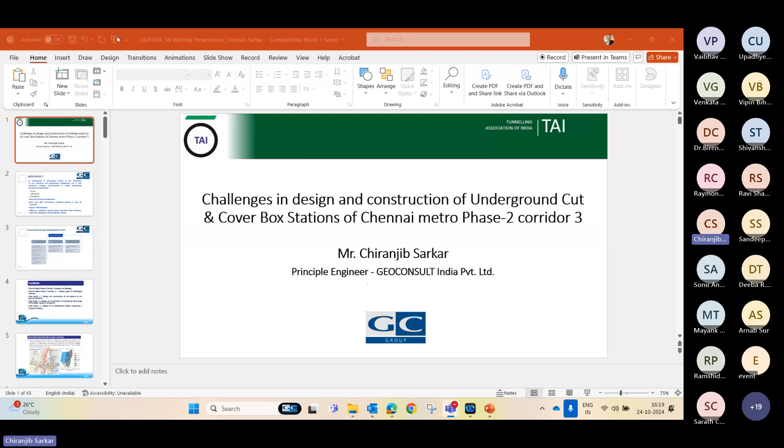Good afternoon, everybody. Today I'm going to share my experience in the design of tunnel and underground structures for metro projects. So the topic of my presentation today is challenges in the design and construction of underground cut and cover box stations of Chennai Metro Phase 2 Corridor 3.

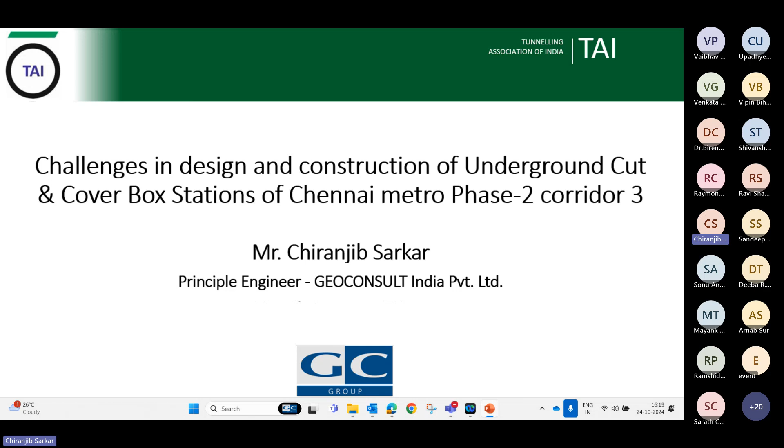About myself, I'm Chiranjib Sarkar, Principal Engineer of GeoConsult India Private Limited, also a governing council member of TAI. GeoConsult is an engineering consultancy group of various disciplines like civil, structural, geotechnical engineering, soil and rock mechanics, geology, environmental and mining engineering, and electrical engineering. We have offices in Argentina, Austria, Brazil, Colombia, Chile, Germany, India, Peru, Singapore, Slovak Republic, and Turkey. These are the presences of GeoConsult in Europe, the Americas, and Asia.

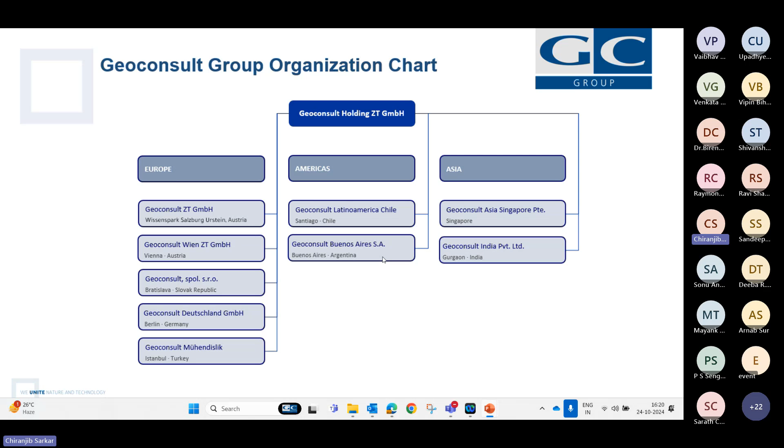Now I'm moving back to my main technical presentation. These are the contents of today's presentation: general overview, location, and geology of Chennai Metro Phase 2 Corridor 3, various types of challenges, and features of Chennai Metro Phase 2 Corridor 3. In today's presentation, I will discuss three major challenges as three case studies.

Case study one, our first case study, is the design and construction of the UG station at mixed ground condition. The second case study is the design and construction of an intersecting interchange station laying at mixed ground. And the third case study is the design of an underground station supporting an entire flyover and ramp.

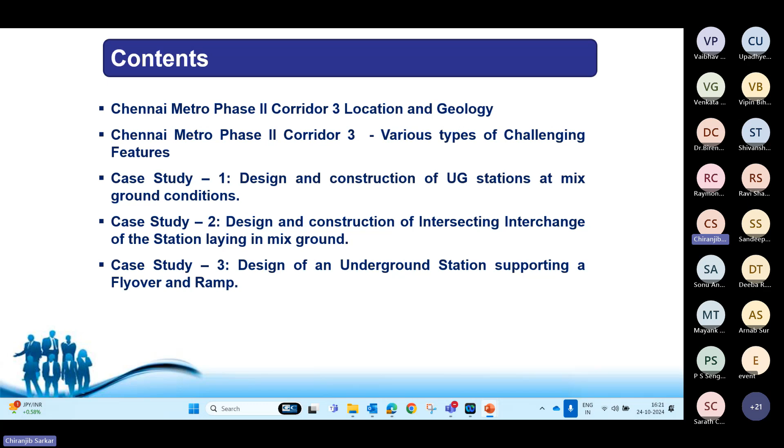The current slide shows Chennai Metro Phase 2 Corridor 3 in purple color line. I think you can see it includes 29 underground stations and 20 kilometers of associated tunnel. The entire Corridor 3 has been subdivided into 5 contract packages: UG1, UG2, UG3, UG4, and UG5.

About the geology of the entire city, it is classified into 3 region-based geology types: sandy area found along the river bank and coastal region, clay area mostly covering the city, and hard rock area found in some central and southern parts of the city.

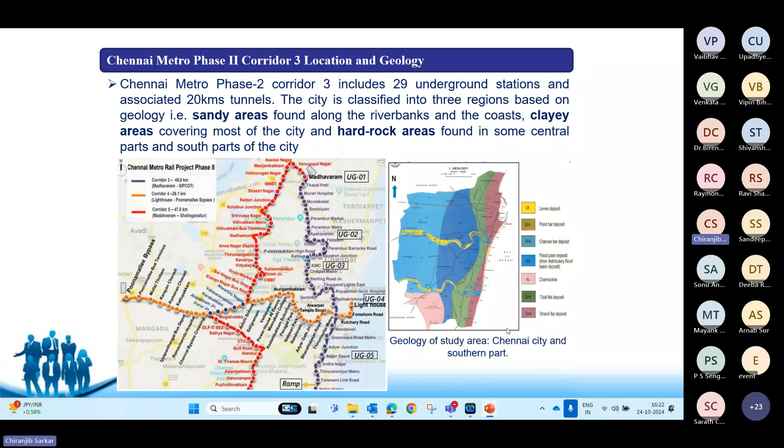Chennai Metro Phase 2 Corridor 3 contains various challenging features like underground station at mixed ground condition, meaning half of the station situated in soil and half in rock. This is called a mixed ground condition. Then there is an intersecting interchange station laying at mixed ground.

It's an interchange between the Corridor 3 and Corridor 4 line. You can see this intersecting interchange is also situated in a mixed ground condition, where half of the station is situated in soil and half is laying in rock.

Then there is a flyover running along the length of the station. You can see the station is supporting the entire flyover and ramp. The fourth feature is the UG station having a crossover and 2 levels of parking. Among these challenging features, today I will discuss the first three as three case studies.

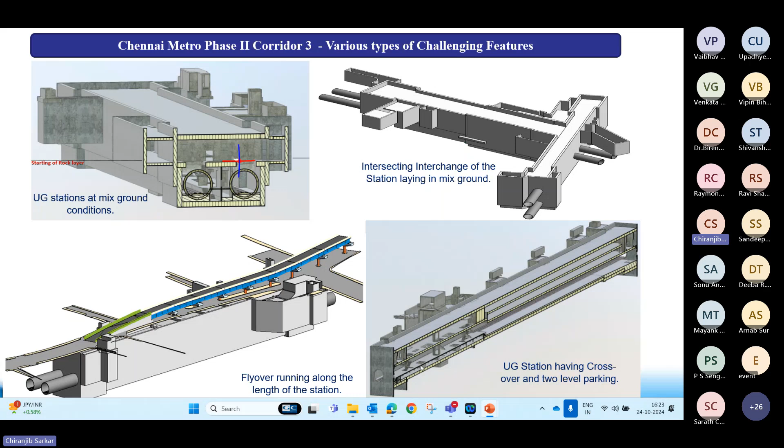Case study 1, case study 2, case study 3. Now I will directly move to case study 1, which is the design and construction of the UG station at mixed ground condition.

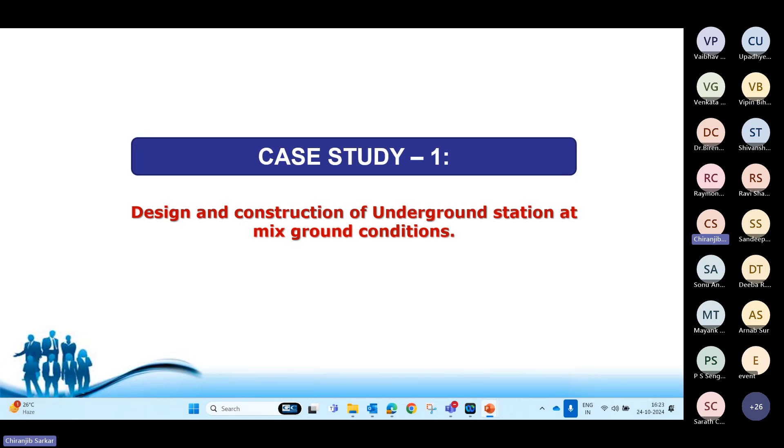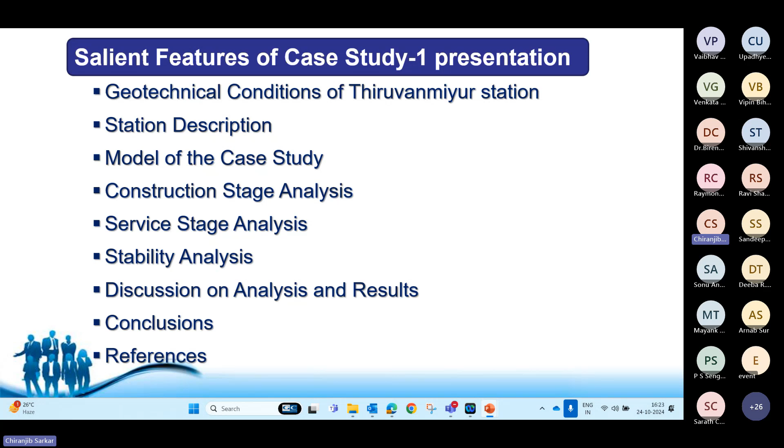These are some major salient features of the case study 1 presentation, the geotechnical condition of the case study, which was chosen for the Thiruvanmiyur metro station. Then the description of the station, the model of the case study, construction stage analysis, service stage analysis, stability analysis, discussion on the analysis and results, conclusion, and a few references.

So the design and construction of the Thiruvanmiyur underground metro station of Chennai Metro Phase 2 Corridor 3 has been chosen here as a project-specific case study. Thiruvanmiyur UG station belongs to contract package UG5.

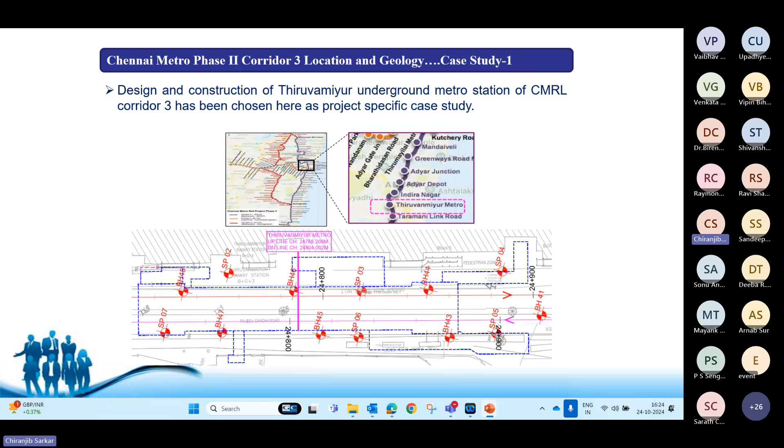The current slide shows borehole locations marked into the station layout. Based on borehole location, a geotechnical long profile has been further plotted, and you can see the station box has been superimposed into the geotechnical long profile.

Now you can see from the rock line diagram that half of the station is situated in soil and half is situated in rock. This is the tunnel profile. This is the station box, the long section of the station.

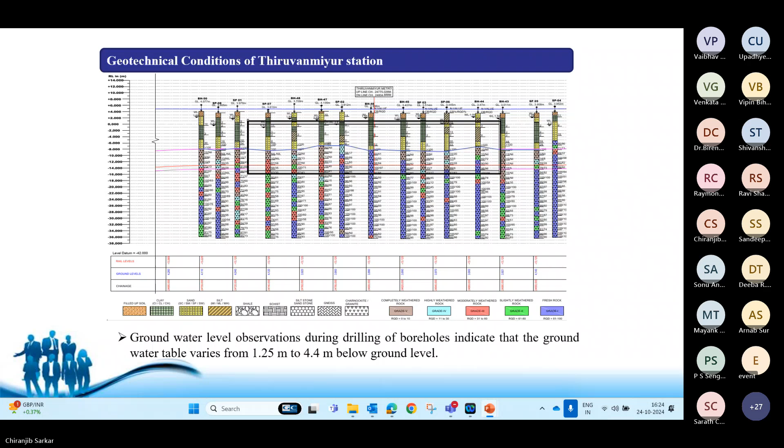Length of the station is 152 meters, height is 16.5 meters, width of the station varies from 20.35 meters at the middle to 24.05 meters at the end, that is at the shaft location.

As I already told in the previous slide, half of the station is situated in soil and half is situated in rock. Due to difficulty in digging in hard strata, as well as the self-standing nature of the rock, the wall proposed here is to be terminated above the base level.

You can see that the wall is terminated above the base level with the help of the shear pin, called toe pin. During the excavation stage, toe pin has been provided to give adequate stability to that diaphragm wall. After excavation and casting of the base slab, a 1.2 meter thick stitch wall has been provided as a connection between the diaphragm wall and the base slab.

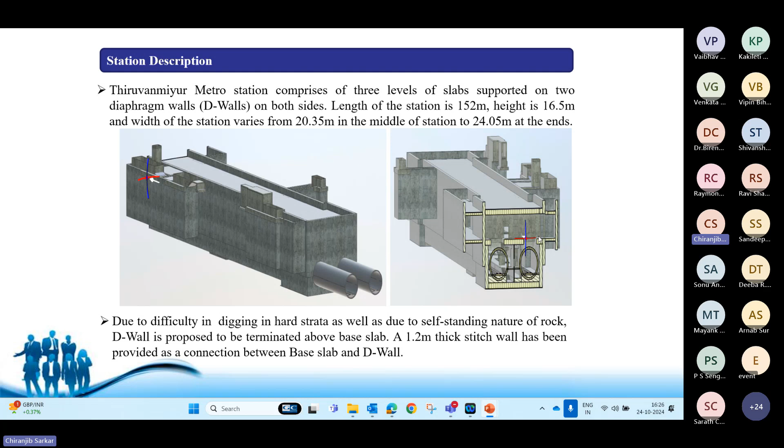This connection will provide the rigid box behavior of the structure. So, due to varying rock layers along the station alignment, three cases have been adopted as part of the model of this project-specific case study.

Toe pin is required for case 2A and 2B. The first one is case 1, that is the diaphragm wall terminating at least 3 meters below the base slab. This is the conventional normal metro station, having a diaphragm wall with embedment length beyond the base layer. That is called case 1.

We don't know the actual starting level of the rock, so three probable cases may arise. There is case 1, then case 2 if rock is encountered above the base level, which is further subdivided into two parts: case 2A, where the rock layer is more than 3 meters below the concourse slab.

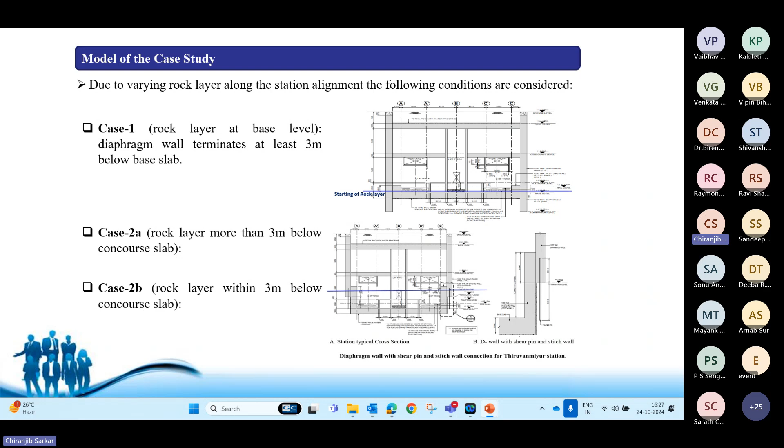And if the rock is within 3 meters below the concourse slab, that is called case 2B. So shear pin is required for both case 2A and 2B.

This is a zoomed-in view of this section, the detailed one. You can see this is the starting level of the rock layer, for example. Due to presence of the hard rock layer, trenching got stuck and the project suffered badly. At that time, toe pin, that is shear pin, was provided below the diaphragm wall to give adequate embedment to the diaphragm wall.

So steel structural members were used as an innovative economical solution, with some utilization of structural steel members in the design of the underground structure.

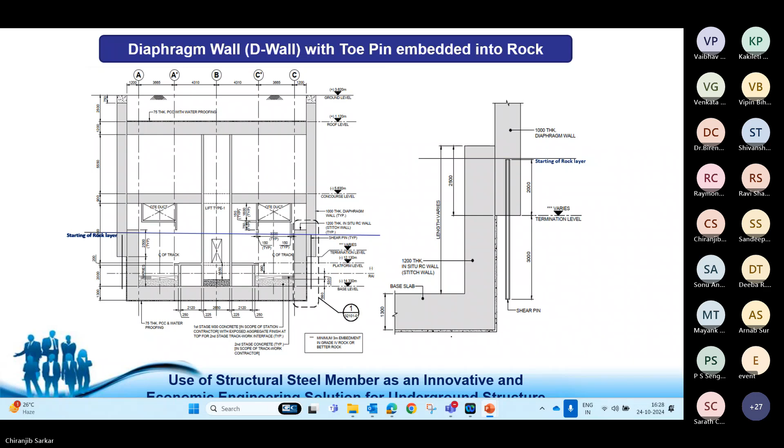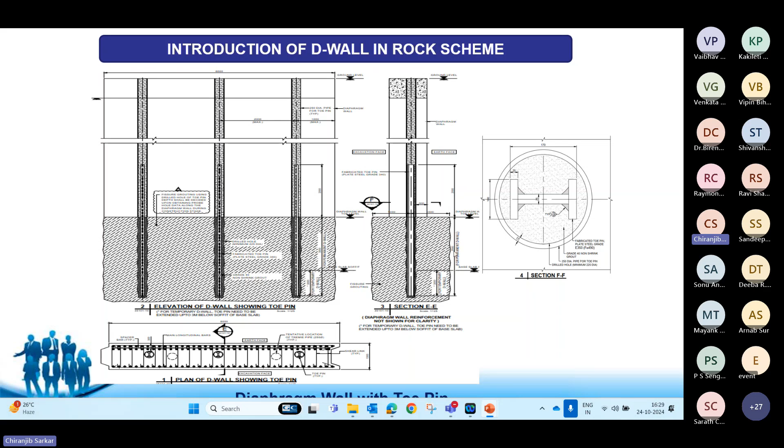The structural steel member is inserted into the diaphragm wall through a 250 mm diameter pipe, and it is embedded into the rock layer through a drill hole. The gap between the tube and the member is filled with grade 40 non-shrink grout material. Further, fissure grout is also provided for the rock for excellent bonding.

Now I will move directly to the advantages of this D-wall with the toe-pin system. First, there is no requirement of separate time and activity for a temporary earth retaining structure arrangement, as the top-down construction sequence with the diaphragm wall has been chosen here. Second, no requirement of separate traffic decking, since with top-down construction it can be easily managed.

After casting of the roof slab, traffic can be diverted above the roof slab. Then there is a reduction in the embedment of the diaphragm wall, as we are not casting the full height of the diaphragm wall. Of course, there is some limitation: it requires more skilled manpower and equipment.

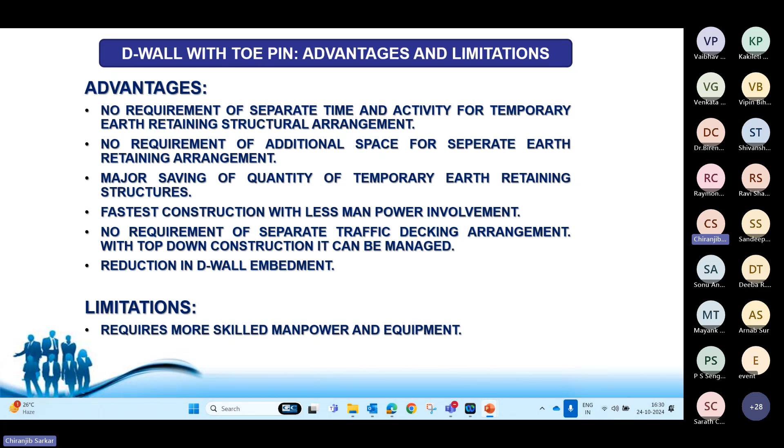As part of the advantages, there is a major quantity saving of the temporary structure. It's a faster construction with less manpower. So these are the advantages. The only limitation is that it requires more skilled manpower and equipment.

As a part of the construction stage analysis, the entire construction stage analysis has been done in the Plaxis software. The toe pin is assigned into the model as a spring stiffness equivalent to the member property.

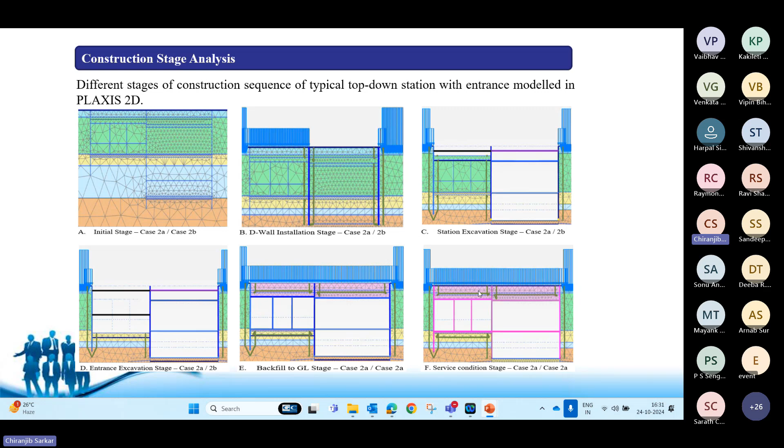You can see this is the initial stage, then the diaphragm installation stage, then the station excavation, then entrance excavation, then the backfilling stage, then the service condition. All these stages have been done for the top-down sequence.

As a part of the service stage analysis, this has been done in the STAAD software for both case 2A to B. Here, the stitch wall has been modeled as an enlarged section, as you can see. The envelope of all cases, case 2A to B normal cases, has been considered during the RC detailed design of the diaphragm wall and the stitch wall.

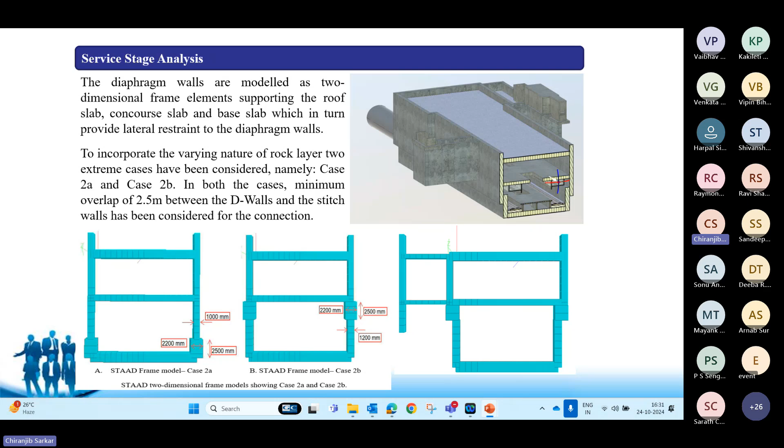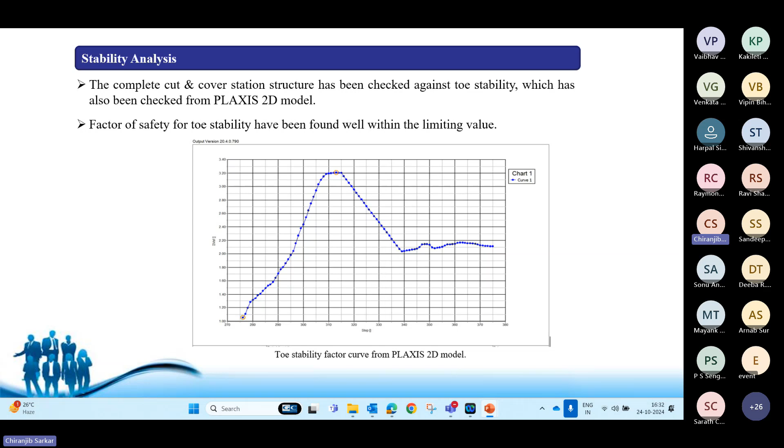As a part of the stability analysis, the entire station box has been checked against toe stability, which is done in the Plaxis 2D software. Factor of safety for the toe stability has been found within a limiting value. Ground stability has also been ensured by checking the ground surface settlement with respect to its limiting value.

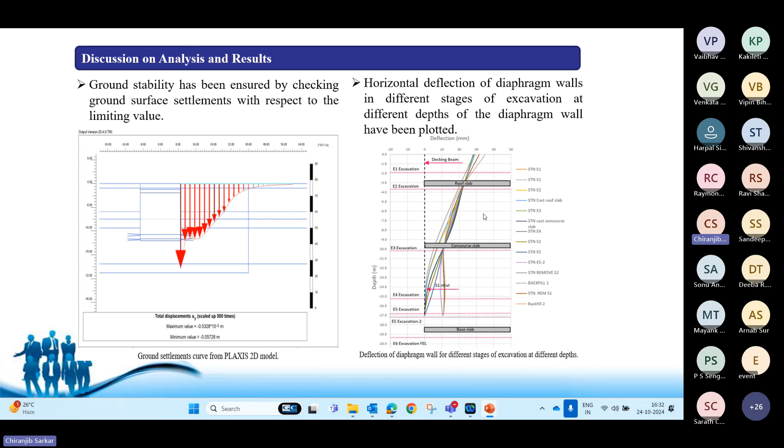We have also checked the horizontal deflection of the diaphragm wall for different stages of excavation, and the horizontal deformation of the diaphragm has also been checked. Now you can see the bending moment and shear force of the diaphragm wall here - these are the bending moment, this is the shear force. Structural RC detailed design has been done based on this envelope diagram.

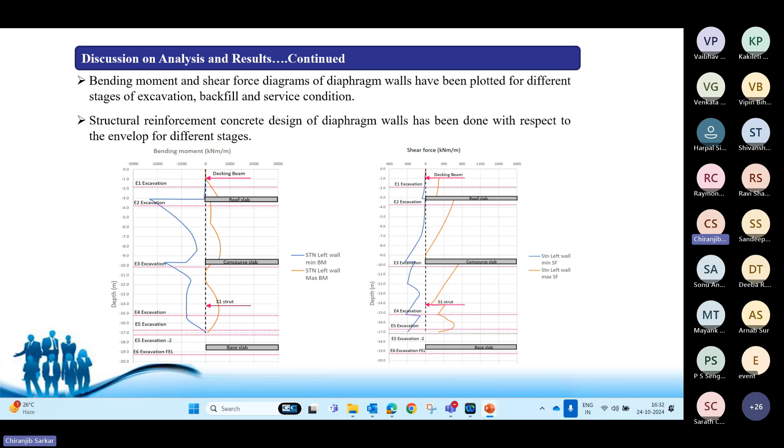Further, structural steel check for the shear pin has been done in line with the criteria of IS 800 2007. Now I will move to the conclusion part for the project specific case study one.

Unconventional and innovative technical solutions may save projects many times from long deadlock conditions. You can see that due to the presence of the hard rock layer, our trenching and digging can get stuck. But as an innovative solution, a shear pin member has been assigned.

So the structural design of the Thiruvanmiyur station, which falls into the mixed ground condition of the Chennai Metro Phase 2, is referred here. Due to difficulty in excavating hard rock strata, an arrangement of a shallow diaphragm wall terminated above base level with a shear pin embedded into the rock strata has been adopted. This arrangement basically reduces the requirement of any kind of temporary earth retaining structure, because here the D wall behaves like the main body of the structure and also a retaining structure.

This arrangement reduces the requirement of any kind of temporary earth retaining structure like soldier piles, secant piles, etc. Therefore, it helps save time, manpower, and material cost of the temporary works and activities for this temporary earth retaining support.

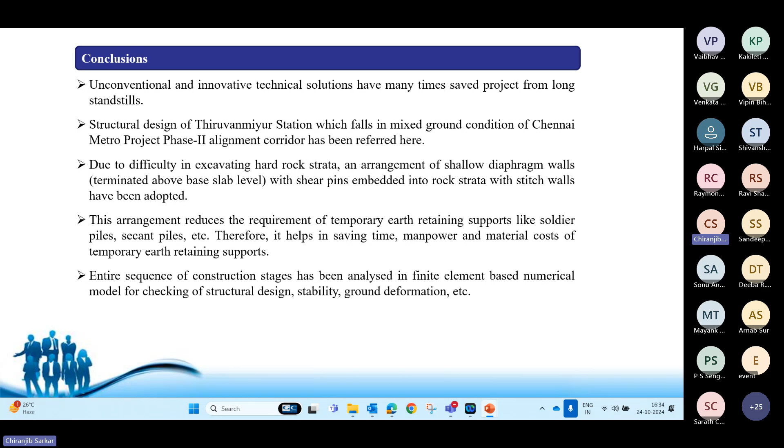These are the few references which have been used during the design of the Thiruvanmiyur station.

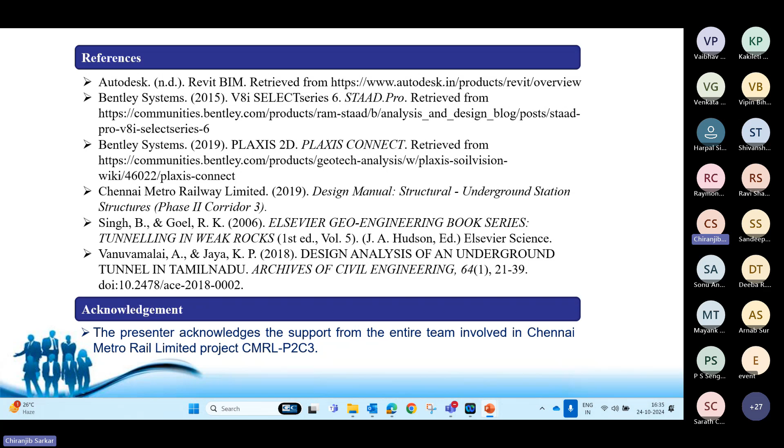I would also acknowledge the support from the entire team involved in the Chennai Metro Rail Limited project - that is the design firm, GC, then the client, and the support from the entire site. Just for information, the present case study has already been published in the Indian Geotechnical Conference IGC 2021.

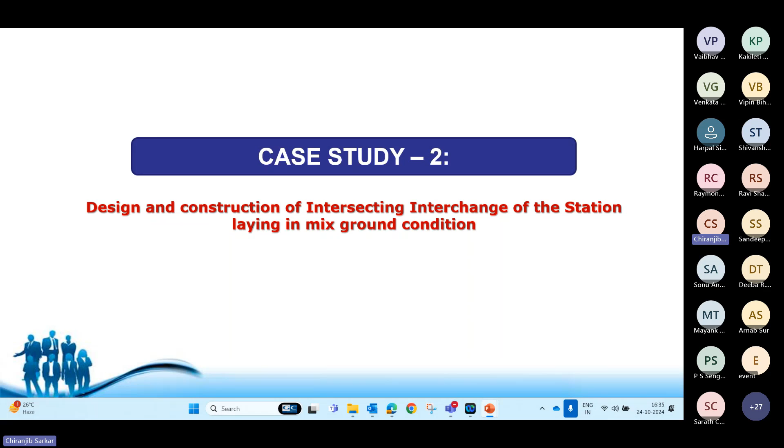Now I'll move to the second challenges and features, or I can say case study 2, that is the design and construction of the intersecting interchange station lying in the mixed ground condition. These are the major salient features for the case study presentation 2.

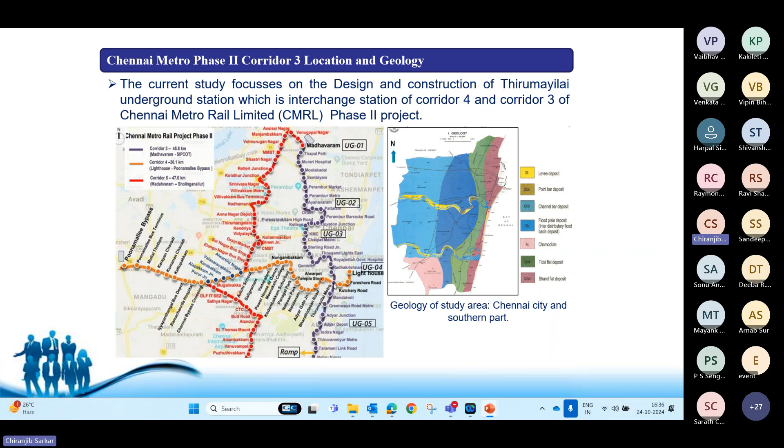The entire Thirumayilai station has been subdivided into mainly two parts - the island station along Corridor 4, that is C4, and the stacked station along Corridor 3. Due to site constraints, you can see that the width of the station is very narrow here.

Due to site constraints, the width of the corridor 3 part of the station has been kept narrow, resulting in stacking of the upline and downline since the station width is very less. So corridor 4 part of the station is proposed as an island between the upline and downline. This is the stack station, with an upline and downline, and corridor 4 part of the station proposed as an island between them. I will show this in detail in the next slide as a 3D isometric view.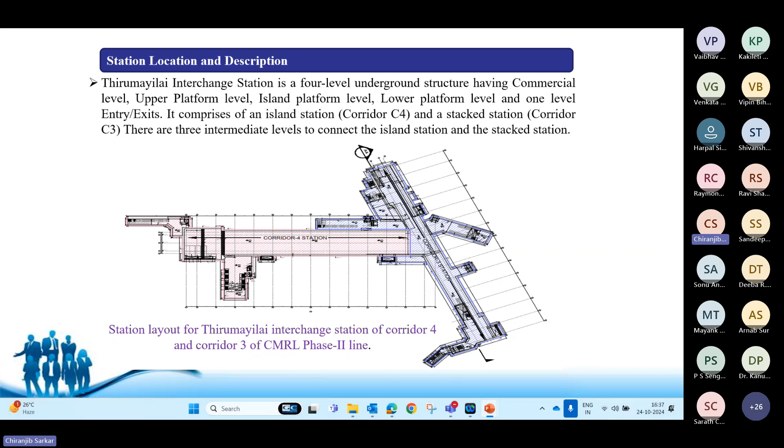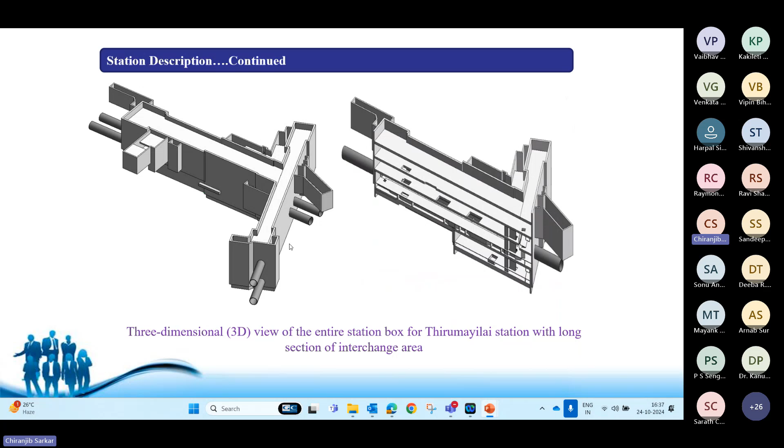Here the station layout of the interchange station has been shown. You can see the three-dimensional view of the entire station box along with the interchange area. This is the island station having the upline and downline, with the corridor 4 tunnel going in between. On the left hand side is the cross section area of the corridor 3 station with the interchange, and on the right hand side is the stacking. This is corridor 3 having a single track in a floor, with the upline and downline, and corridor 4 part of the station going in between as an interchange.

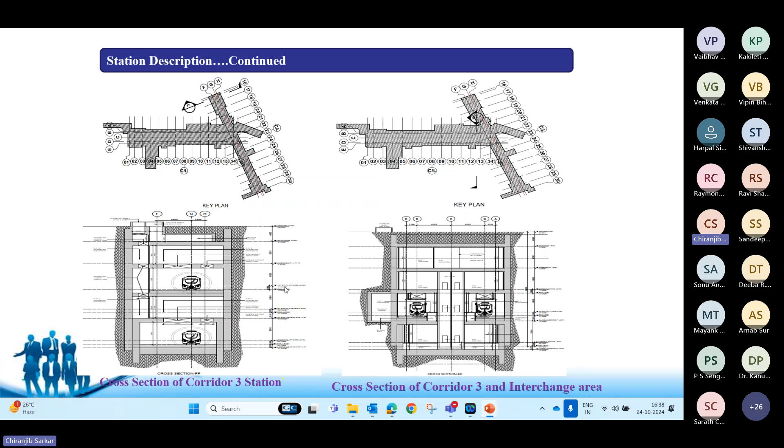As told earlier, the geological condition of Chennai city is mostly clay and sand found along the river bed and coastal area, and hard rock found in some central and south parts of the city. So for Thirumayilai station, the subsurface stratum at the site contains mostly cohesionless soil and weathered rock.

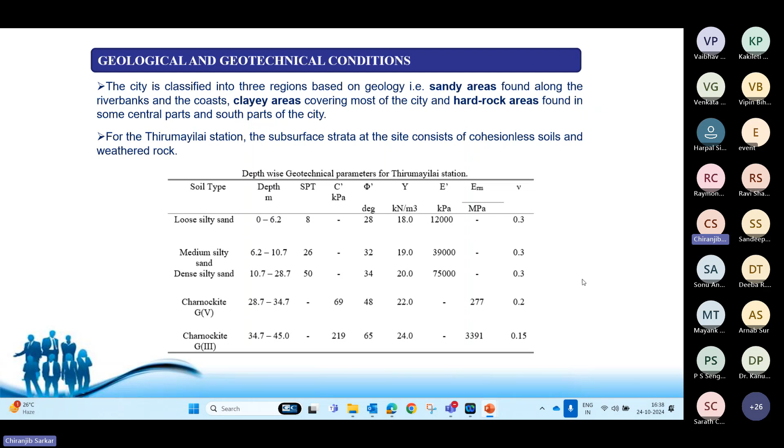The current slide shows the depth-wise geotechnical parameters for Thirumayilai station. Further, the station box has been superimposed onto the geotechnical long profile for Thirumayilai station. You can see from the rockline diagram that half of the station is situated in the rock and half of the station is in the soil. This is the island part of the station, parallel to corridor 4, and this is the geotechnical long profile superimposed for the stack part of the station.

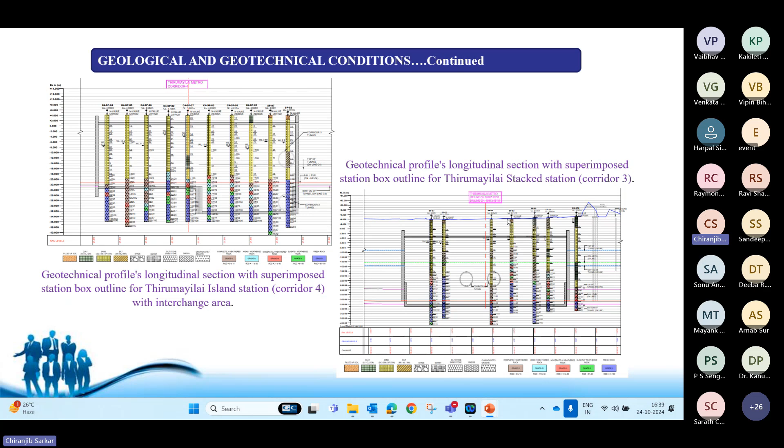Now the model of the case study. Due to varying rock layer along the station alignment, two cases have been adopted as part of the project's model case study: case 1 and case 2. In case 1, the rock layer is below or at the island undercroft level slab, so the diaphragm wall has a typical embedment of 3 meters into grade 4 rock and 5 meters for grade 5 rock. That is the condition of case 1. In case 2, the rock layer is below the island undercroft level, so the diaphragm wall is terminated above the lower undercroft level, and since it is terminated above the lower undercroft level, a shear pin embedded into the rock strata is required. Case 2 is applicable especially for the stacked station, basically from GL grid 16 to GL grid 18.

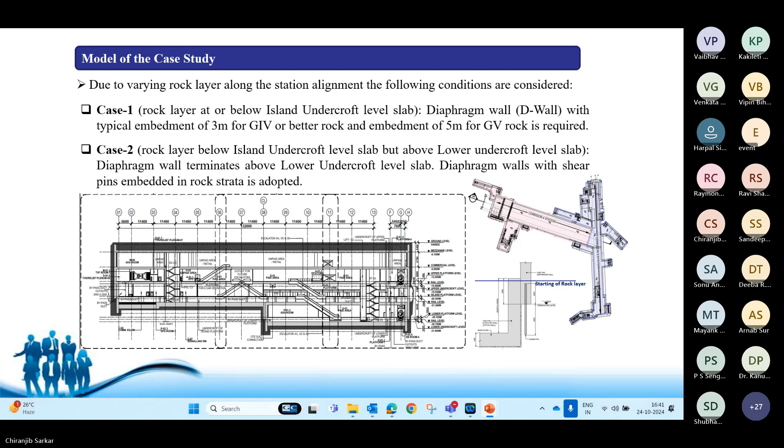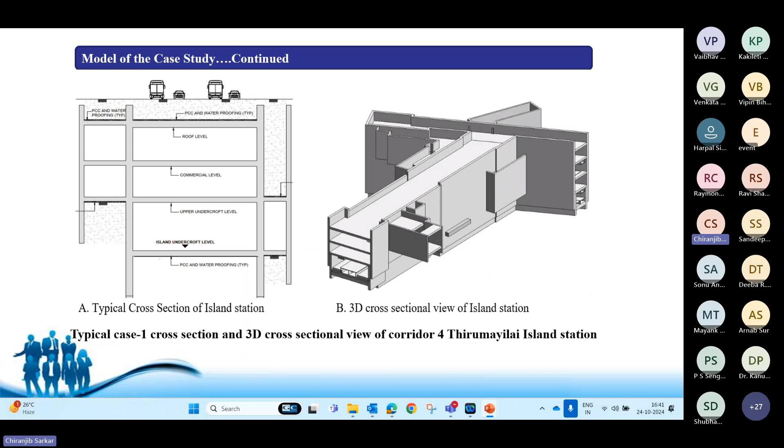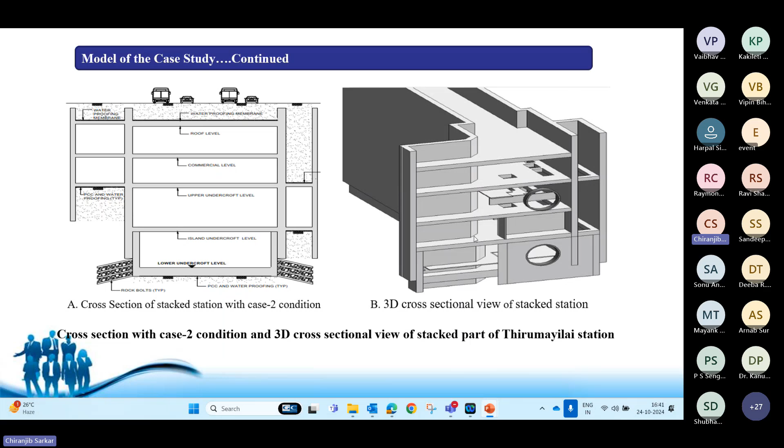The current slide shows the cross section with the case 1 condition, and also a 3D cross sectional view of the typical case 1 condition, with the wall having embedment below the undercroft level, for the corridor 4 part of the island station. Now the case 2 condition, also for the stack part, you can see the upline and downline, and the island part having the interchange part.

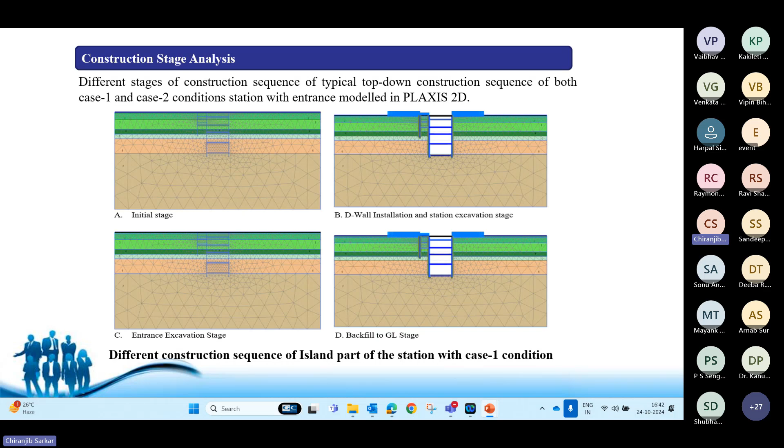The current slide shows the different stages of the construction sequence, top down sequence, for both case 1 and case 2 conditions, with the entrance modeled in PLAXIS. The current slide shows the different construction sequence of the island part of the station, defining the construction sequence for case 1, which is applicable for the corridor 4 part, that is grid 1 to 18 of the station. The second slide shows the different construction stages for the narrow stack part of the station with the case 2 condition, since the narrow part has relatively higher depth, and case 2 condition prevails there.

Here the shear pin, or toe pin, has been assigned a spring stiffness as the equivalent member property.

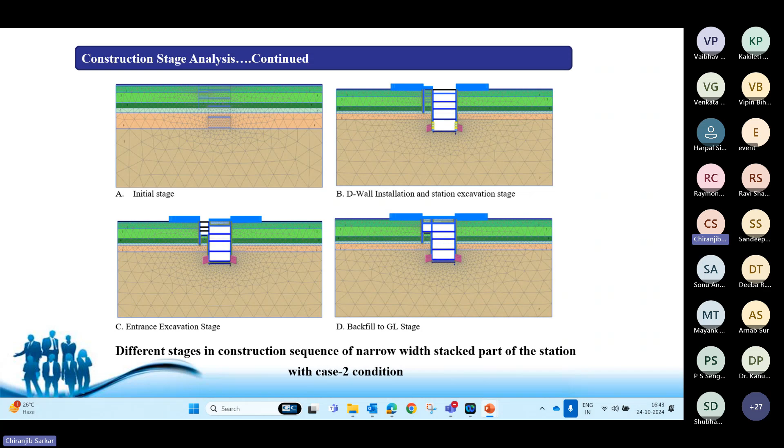Entire service stage analysis has been done in the STAAD Pro software for both case 1 and case 2. Case 1 is the island part of the station, and case 2 is the stack part of the station.

The stitch wall has been modeled again in a similar way, modeled as an enlarged section.

So envelope of all these cases has been considered during the detailed design of the diaphragm wall and the stitch wall. All different levels of the slab have been checked by developing a 3-dimensional plate model with a permanent opening. You can see here the slab has been modeled with a plate with a permanent opening, which is subject to full service load state.

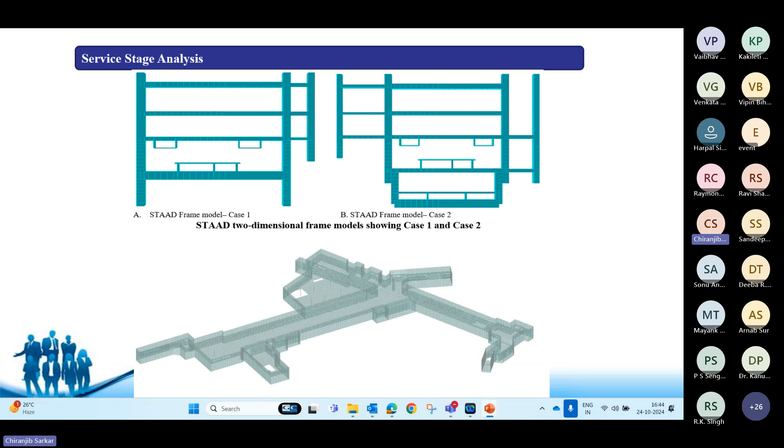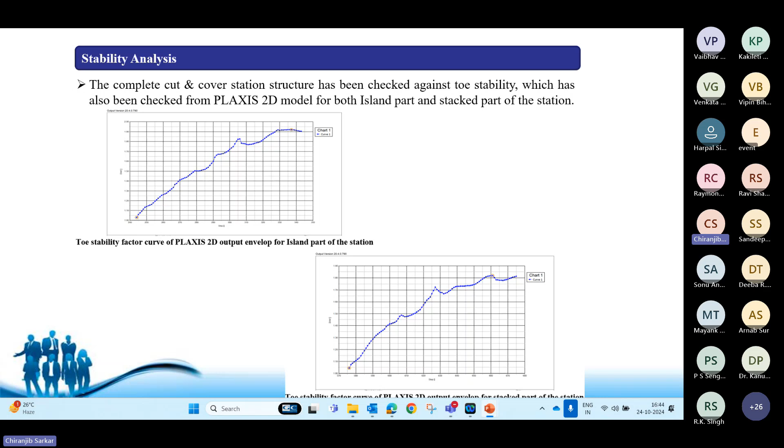This is under both serviceability check and an ultimate check for the limit state, that is ULS and SLS condition. Stability of the entire station has been checked against toe stability in Plaxis 2D software for both the island part and the stack part of the station. Factor of safety for toe stability has been found within limit.

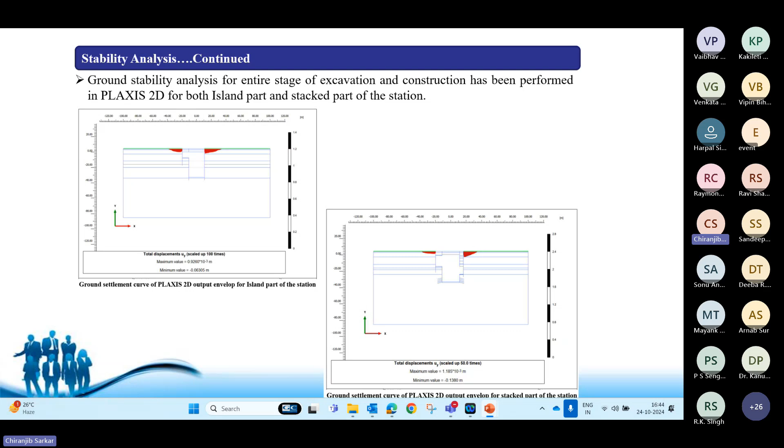Ground stability also has been checked for the entire excavation and construction, performed in the Plaxis 2D software. Ground stability was also ensured by checking the surface settlement with respect to its limiting value, and it is also found within limit.

So as an outcome of the different series of model analysis for both the island part and the stack part of the station, deformation, shape, and bending moment behavior have also been studied.

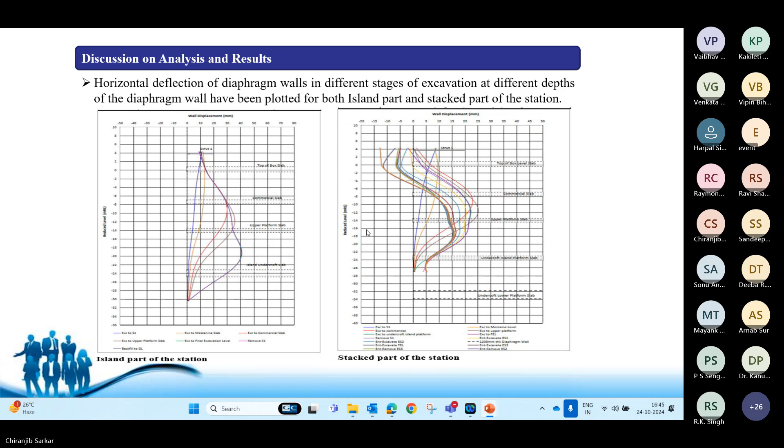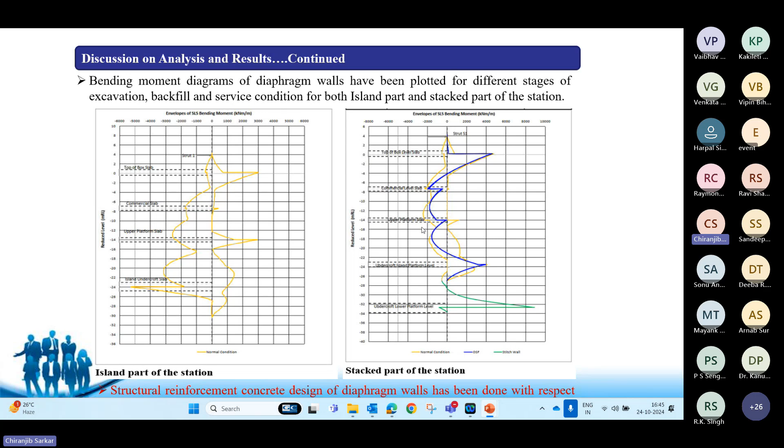That is for excavation, backfill, service condition - all cases. It's the envelope of all cases for both the island part of the station on the left hand side and the stack part of the station on the right hand side.

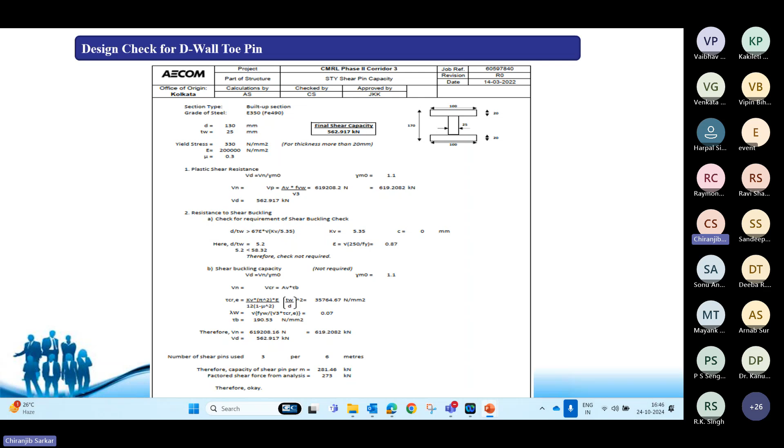Similarly, for structural steel design, because in case 2 you have the two shear pins, the structural design check for that shear pin with respect to the loading condition for case 2, the stack part of the station, has been checked as per the steel code IS 800 2007.

Now we'll move to the conclusion of the project-specific case study 2. Due to site constraints and land issues, as I already shown, the corridor 3 part of the station is adopted as a narrow width stack station.

Thus, corridor 4 part of the station is proposed as an island between the stacking of upline and downline, with an interchange connection area. So this is the basic geometrical features of the entire Thirumayilai station.

It's an interchange station having stack of upline and downline, because corridor 3 is a very narrow width due to land issue, and the corridor 4 part of the station is proposed as an island station between the stacking of upline and downline.

As part of the economical approach in design and construction, the Thirumayilai station has been proposed with the top-down method to get the advantage of the diaphragm wall for faster construction, less manpower and equipment. Due to encounter of the hard rock layer, a shallow depth diaphragm wall with toe pin embedded into the rock strata system has been adopted.

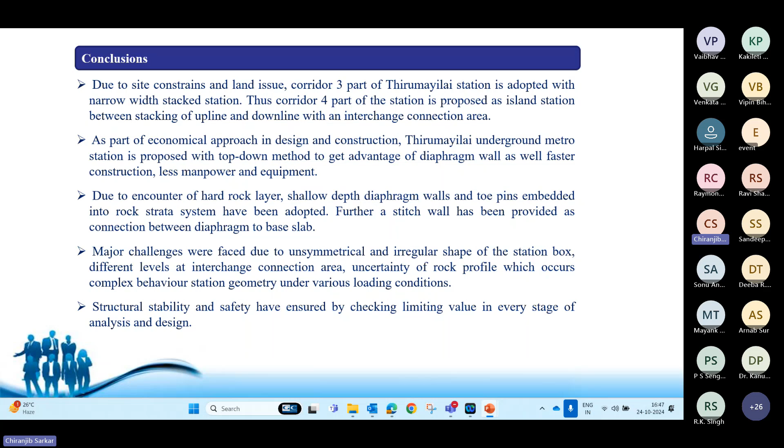Further, a stitch wall has been provided as a connection between the base slab and the diaphragm wall. The major challenges were faced due to the unsymmetrical and irregular shape of the station box at different levels, and also its interchange connection area and uncertainty of the rock profile, which resulted in complex behavior of the station geometry under various loading conditions. Structural stability check and safety check were also a challenge, and this was ensured by checking its limiting value at each and every stage of the design analysis.

So these are the conclusions.

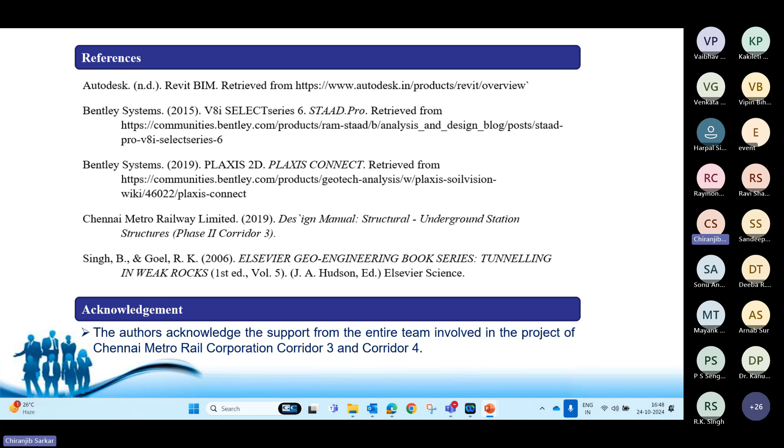Now the last one - I'll quickly go through project specific case study 3, a design I'll cover briefly due to limited time. This is a design of an underground station supporting a flyover and ramp, providing a multi-dimensional transportation system for a busy road crossing at Radhakrishna Salai Junction station of Chennai Metro, where a highway flyover is planned above the underground corridor station. The design and construction of this station from Chennai Metro Phase 2 Corridor 3 is referred to here as project-specific case study 3. In the next slide, I'll show some three-dimensional views and cross-section designs.

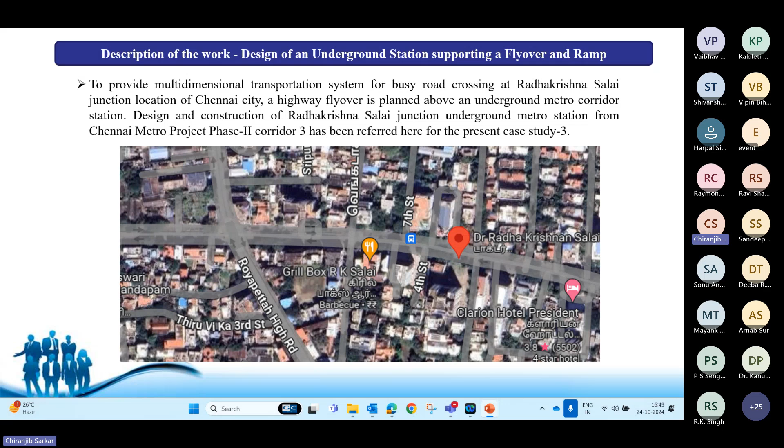As a description of the design of the underground station supporting the flyover ramp, the entire station comprises 3-level slabs supported on 2 diaphragm walls. In a metro station there are 3 levels of slab: the roof slab, intermediate concourse slab, and base slab. The entire station is supported by these 3 levels of slabs and diaphragm walls on both sides, with the diaphragm wall considered as the external wall member forming the station. Both the main station and launching shaft area are proposed as a top-down sequence of construction to get the advantage of the diaphragm wall and decking.

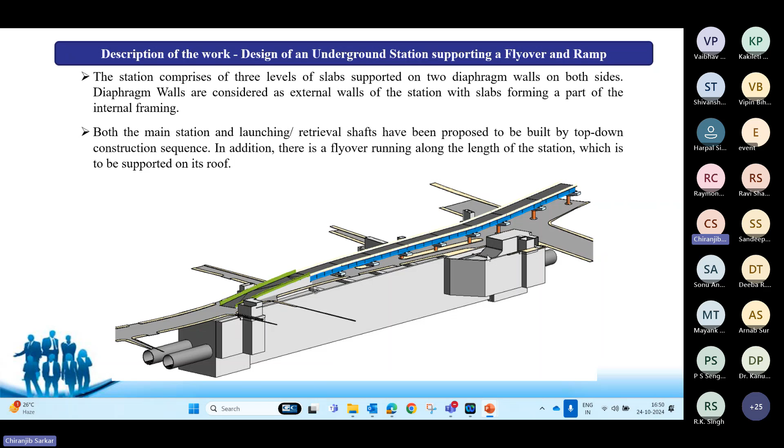In addition, there is a flyover running along the station, supported on the roof slab. So the entire station box behaves like a foundation for the entire flyover and ramp part. You can see the flyover part and the ramp part, which is supported by the station box.

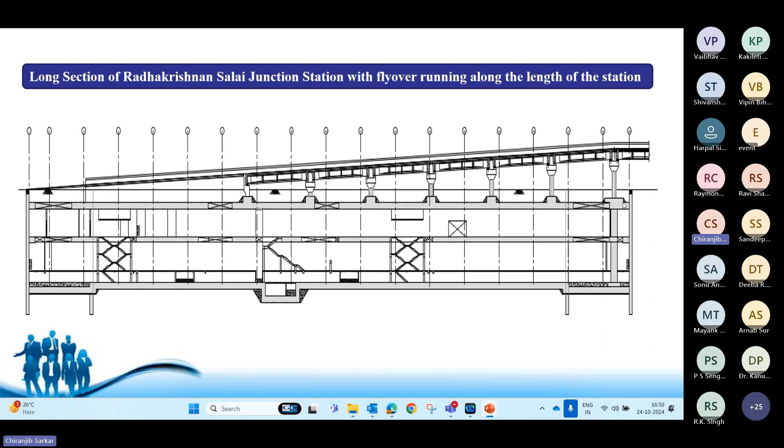This is the long sectional view of the Radhakrishna Salai Junction station - this is the 3D isometric view, and this is the long section view. These are the flyover parts, you can see the flyover pier also, and these are the ramp parts. The flyover pier is actually supported by the roof slab having some cross beams.

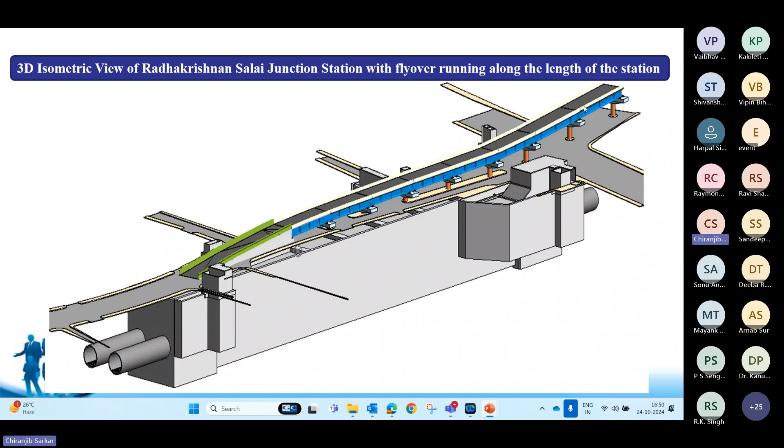Again, I'll show some 3D isometric views along the length of the station - this is the flyover part, this is the ramp part. In the next slide you can see the long sectional view of the station along with the flyover, showing the 3 levels of slab: roof slab, concourse slab, and base slab. The tunnel is also shown - this is the platform, the concourse area.

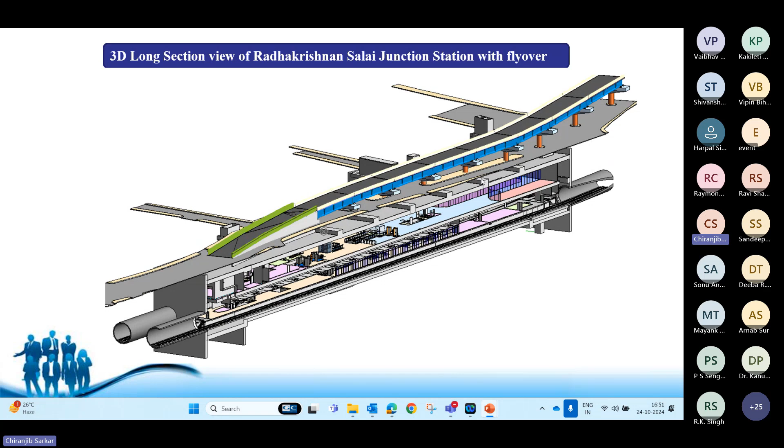Now I'll move to the design part. The structural design here considers critical forces from the construction analysis, obtained from the soil structure analysis done in Plaxis software. There are two types of flyover piers - a 20-meter plus 20-meter long flyover span supported pier, supported on the station. You can see here the 3 meter by 2.4 meter wide long roof beam supported on a 1 meter diaphragm, with a roof level beam also here.

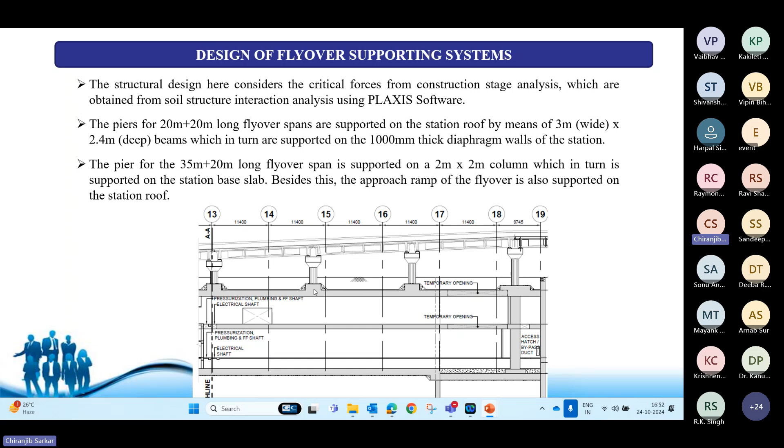There is a pier at the end location with a 35 meter plus 20 meter span - one side span is 35 meter, another side is 20 meter, and there's also a typical span of 20 meter plus 20 meter. So all flyover piers are supported by beams which are monolithically connected with the roof slab. The beam size is 3 meter wide and 2.4 meter deep, directly supported on the diaphragm wall on both sides, and there is analysis for the flyover part.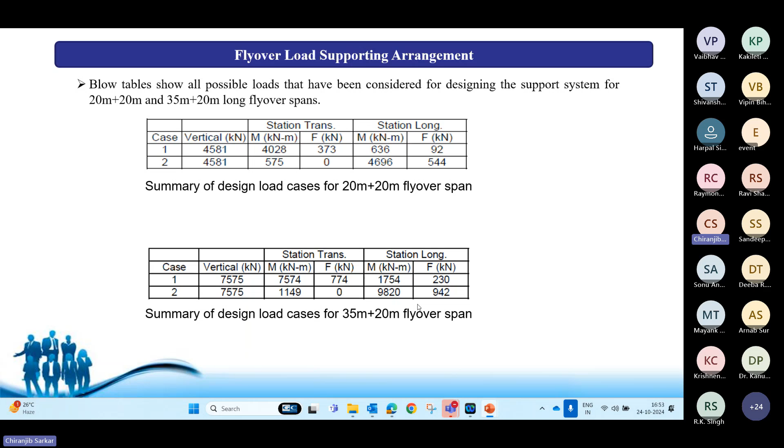The table below shows all possible loads for the flyover span - the design summary of the forces. These are the summary forces for the 20 meter flyover span, and this is for the 35 meter by 20 meter flyover span.

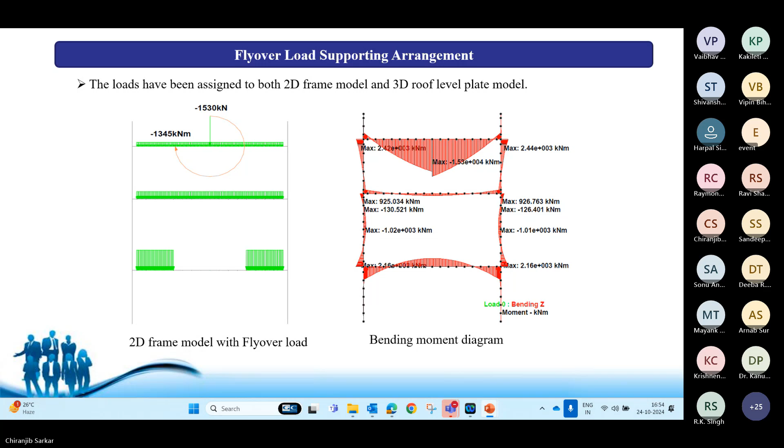The major thing is underground construction is gaining popularity by playing a key role in improving many urban space congestion problems. To provide a multi-dimensional transportation system on a busy road crossing, at Radhakrishna Salai junction station, an entire flyover is planned above the underground corridor station.

These are the main features of case study 3. The present case study describes the design concept, optimization opportunity, and challenges of this underground station supporting a flyover ramp. The entire station comprises 3 levels of slab supported on 2 diaphragm walls, and diaphragm walls are considered as the external wall which, with the slab, forms part of the internal framing.

The entire underground station construction is planned with the top-down sequence. The flyover and ramp part has been planned to cast later on. Once the civil work of the underground station is completed, then the flyover and ramp work will be done. The most important thing is that structural stability and safety of the entire area has been ensured in each and every stage of analysis and design.

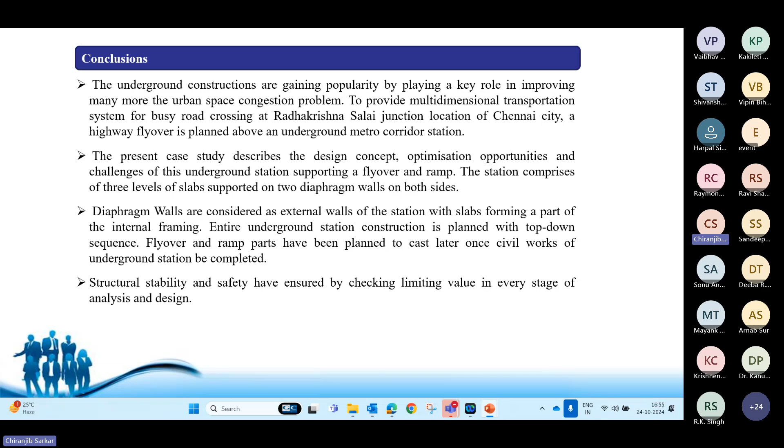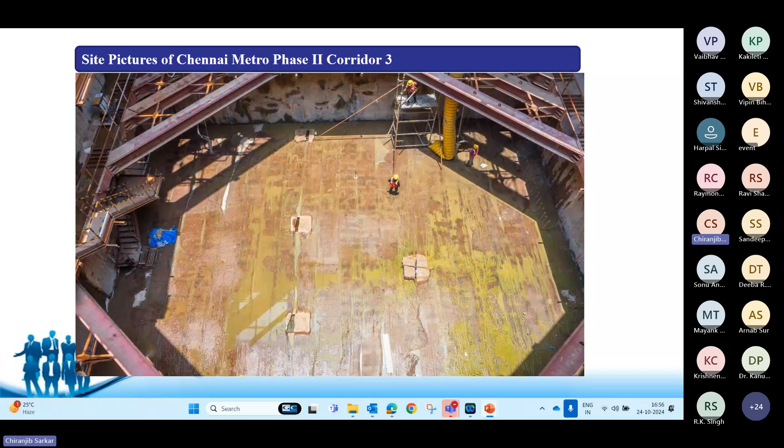Now I will just show a few site pictures during the live project, the Chennai Metro Phase 2 Corridor 3. These are a few site pictures showing the execution already started and going on. It's already 4:56, I think.

Bye. Akshaji, over to you. Thank you, sir, for your time.